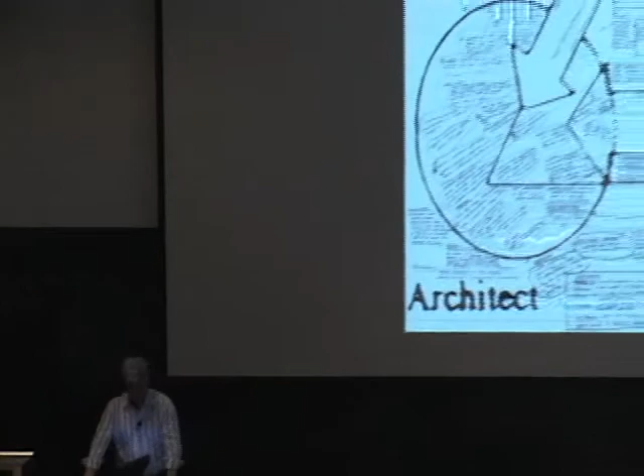Hi, thanks, KB. Since your lecture series is entitled Practice, I thought I would give to the students a kind of a short history of modern practice. If you were practicing maybe 30 years ago, the diagram of the profession might look like this, with the owner and the architect and contractor at different corners of a triangle. I suppose the arrows here are flows of information, most likely. But also note that the circles are the same size, they're all equal in this equilateral triangle.

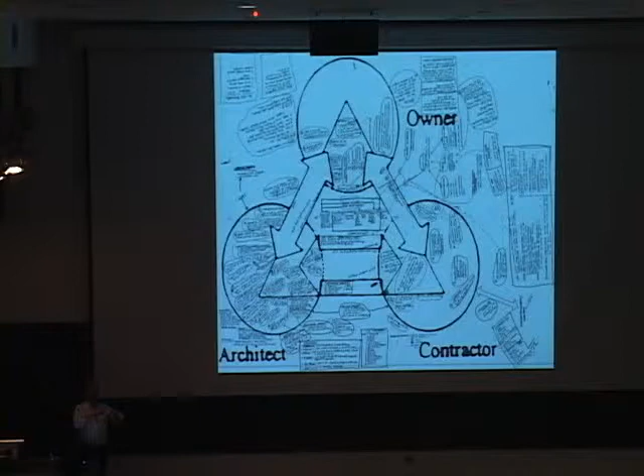So the point being, along with this diagram changing, the profession has changed and the role of the architect has changed, okay? The profession is at something of a crossroads right now, and we have to figure out how we get back toward the center of things. One way is the architect now has to think more about the how, as much as the what.

So as an example from practice, this is a project we recently did. It's a public high school, and when you're doing public work, there's a lot of mandates. There's a thick book of standards you have to follow, everything from room sizes to the materials you can use, and the building had to be masonry. So what can we do with masonry?

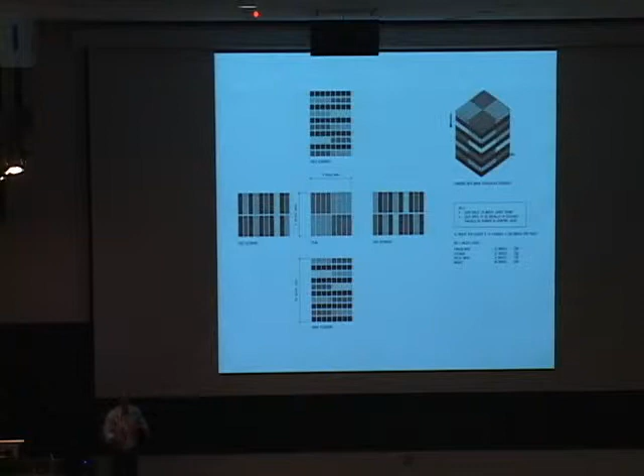So that was off the table, it was too expensive, so we had to do a running bond, or we said, wait a minute, what if we think about this? So we researched the bricks and went back to the brick yard, and we found out that they would palletize the bricks in any order or any way that we wanted. So working backwards from the desired pattern, we came up with a configuration of a pallet of bricks such that a mason could grab one in an unthinking way and put it into the wall, and our desired pattern would result. These are some early studies.

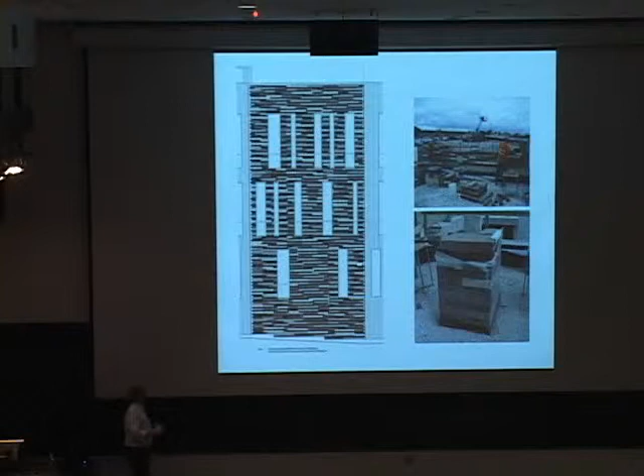Sounds easy, was actually very difficult. We spent about three weeks working this out. Here's one of the failures. We had to figure out what happened when you came to a window, how that would mess up the pattern, and how we came to the corner. Once we thought we had that figured out, we built a little mock-up here on site. Here's one of the pallets of bricks coming to the site. And then we got it reasonably worked out.

The next challenge was that the masons worked 12 to 15 abreast, working at the same time, almost like typewriters going along a line, then another line, another line. So we used the control joints that were necessary in the brick wall to control the area of work for each mason, and each mason got his own pallet of bricks. This is the resulting wall, which we were pretty happy about. But it illustrates the new kind of work one has to do. Maybe 20 years ago, we could have just told them to do it that way and gone off and had a martini. But it doesn't work that way anymore.

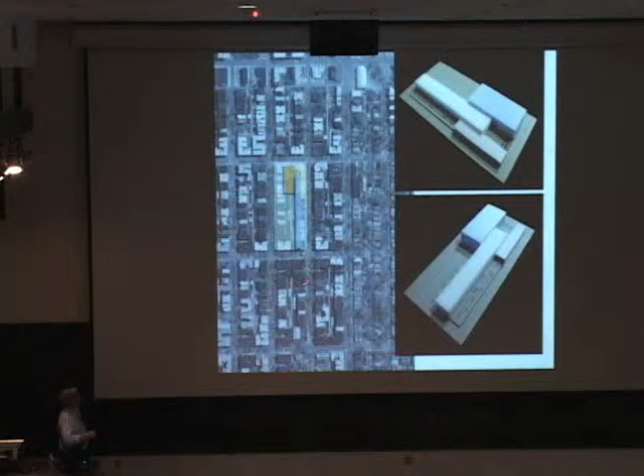This is a prototype high school, I should mention. This is a little more on that project. The idea was to design a very compact urban high school that would fit on a single city block in Chicago, measuring 266 feet by 600 feet. So we would slide these little volumes back and forth.

Again, it's mostly about configuration and circulation because the classrooms are somewhat dictated. So here's an entry plaza here. This is a reading garden off the library, and then this would either be parking or athletic fields, depending on where the school was located.

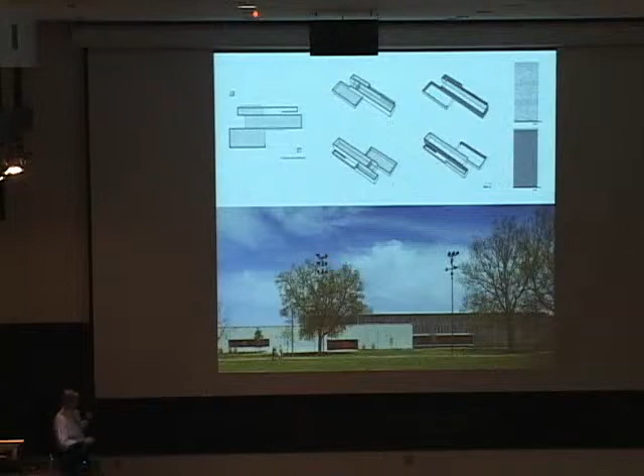This was the first one out of the gate. This is South Shore High School, not far from the Gary Comer Youth Center. Here you can see it in context. Again, this idea of a very thick wall that served as a thermal mass for the building, and it would snake through and create these three zones, body, mind, and spirit, we called them. The wall would be light on one side and dark brick on the other, so that your view or perception of the massing would change based on the viewer's perspective.

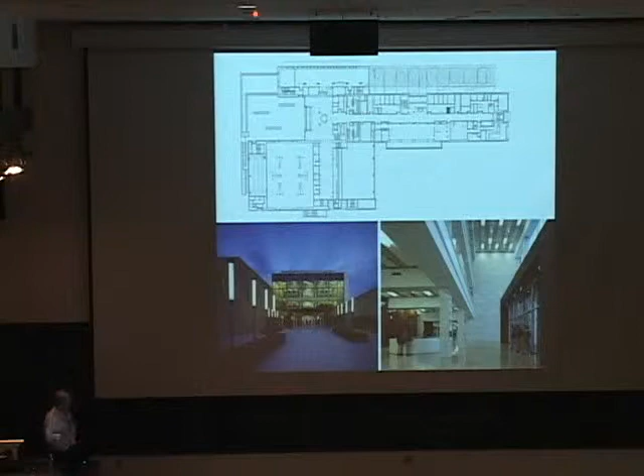This is the second floor. There's an academy here with a commons, which you see here, that looks down over that entry plaza, and then the arts wing with art and music rooms.

This is the third floor. Note the clerestory lighting brings natural daylight into the corridor, and then there's little windows above the lockers there you can see. So you're getting indirect light into the classroom, natural light from two sides into every classroom.

One of the features we built into the school was that certain components, the gym and the library namely, could be used by the community when the school was closed. A lot of these schools are going into neighborhoods that maybe don't have libraries or recreational facilities. So by doing this, the neighborhood can get both a school and a library, a recreation center, and so forth.

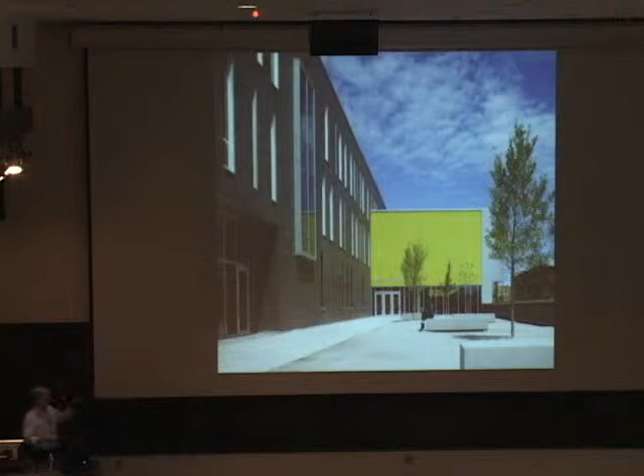So this is the entrance to the library. When the school is closed, you enter through a raised reading garden that pulls students off the street, which is a little bit dangerous in this part of town. This is the gym entrance, which is immediately adjacent to playing fields.

That idea really came from this project we did in 2003, the competition for the Perth Amboy High School, which we won in January of 2004. It was a high school for 500,000 square feet for 3,000 students in Perth Amboy, New Jersey.

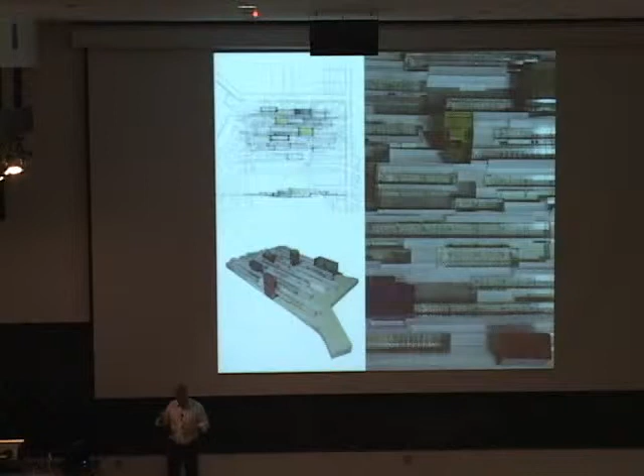Perth Amboy, similarly, had a demographic of lower income neighborhood, a lot of recent immigrants, and not many amenities, not great libraries or facilities. So the building was designed almost like a civic cultural center superimposed over a high school, where the communal functions, like the gym, the auditorium, and so forth, were housed in these towers that would come down and spike through the classroom, so the community could come at night and use the library and the gym without going into the school.

So the design is exploded here into these three systems. These are the towers that house the communal functions, the gym, the library, auditorium. This is what we call a barscape, a one-story system of academic tissue, or classrooms, that would span over this mat, which is the surface of the site, high at either end and low in the center.

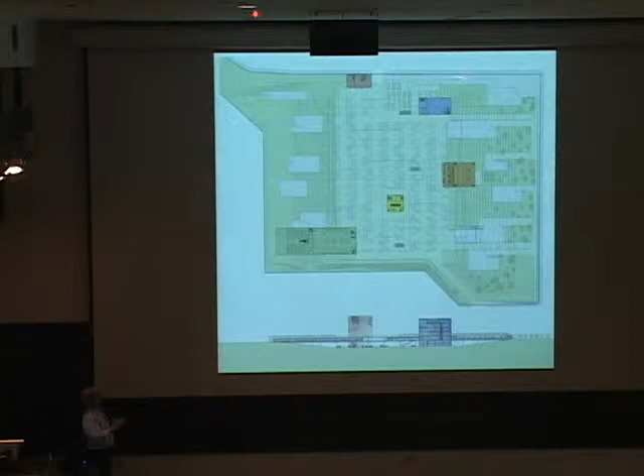So we do all our parking on grade and then come up vertically through the building. This is the mat level plan in section. You can see how the site is high on either end and low and flat in the center. This is where we would park the cars underneath the building and then come up into courtyards and so forth, so somebody from the community coming at night to go to the library could drive in, park near the library, and go directly into the tower without entering the school. This is an image from the parking level going up to one of these entry courtyards that then leads into the building.

This is the main classroom level plan, or barscape plan as we were calling it. The school is divided into six academies that were keyed into the local economy, so kids could graduate from school and then go right into a job.

Each of those academies was anchored by a tower. For example, this is the Performing Arts Academy, anchored by the auditorium.

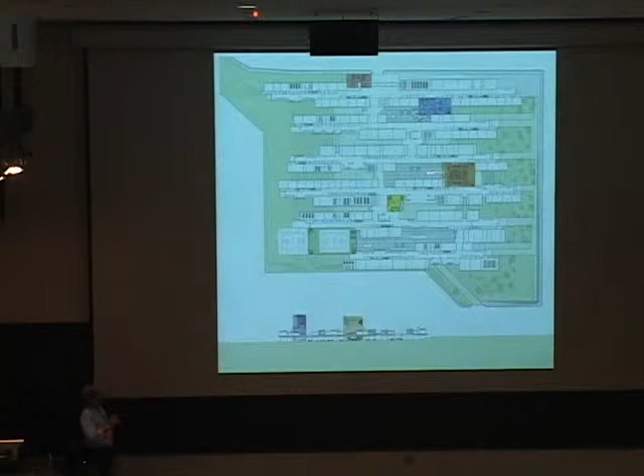These three spaces are the outdoor courtyards you enter from the parking area—entry courtyards. There are also outdoor classrooms and spillover space for events, like a graduation happening in the auditorium that could spill out into those protected courtyard spaces.

Like an organism, the building was designed so it could expand over time and increase in capacity by 25%. Think of the towers as vital organs, and this as the tissue that could grow to expand with demand.

The towers were coded with graphics so people from the community would understand them. Someone trying to find the library would know to go to the yellow tower. In a school for 3,000 students on a 16-acre site, the towers also serve as navigating devices once inside, to help find your way around.

The spatial idea—the tectonics—involve a platform made of precast double T's, then light gauge metal construction forming this bar-scape, with the towers coming down through conventional braced steel frame construction.

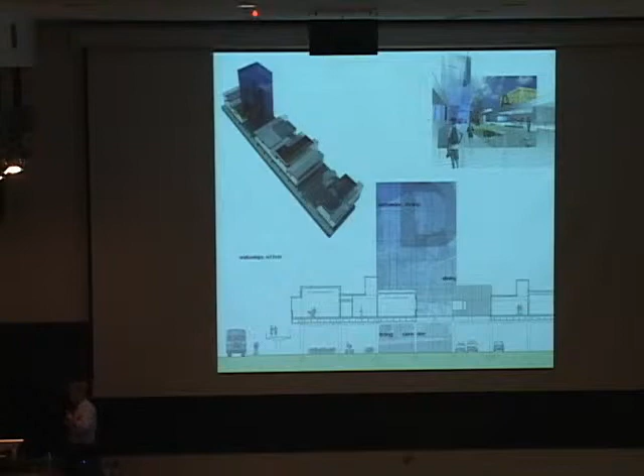So the formal idea is really an agglomeration of very simple forms. We were searching for more of a spatial complexity and a formal simplicity. The forms mean nothing in and of themselves.

It's when they're combined—being in one space and looking through a second space to a third space. This is a theme in my work that we picked up on the Gary Comer Youth Center: this notion of spatial layering, being in one space and looking at a third space through a second space, where you can be both actor and spectator at the same time.

This is a view early in the design process of being in the entryway, looking through the cafeteria into the gym, and then out the other side of the building.

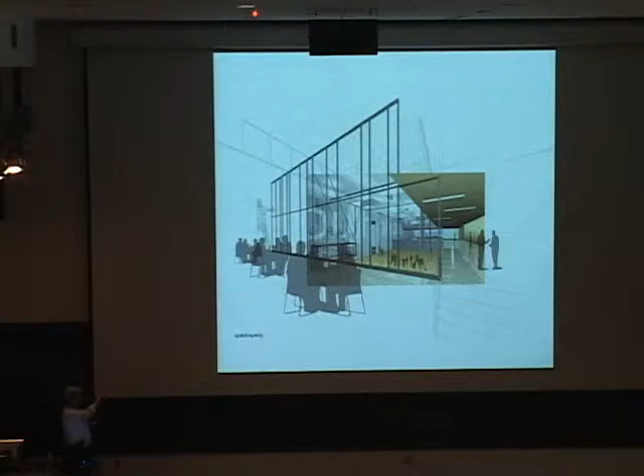This is the Gary Comer Youth Center. It was originally designed as a practice and performance space for the South Shore Drill Team, a dance and performing arts troupe.

Here you can see them practicing in the building. When we were designing it, it started as a gym, a practice space, but quickly grew into a youth education and recreation center—really to provide kids a constructive environment in their after-school hours, because this neighborhood was prone to a lot of drugs, gangs, and problems. The idea was to give them a constructive environment to spend those hours.

This is the drill team practicing in the gym, and this is looking up through the cafeteria to the rec room. This is from a bridge looking through the outdoor courtyard and then on into the gym. The parti is comprised of the main spaces for the drill team in the center, and a series of programmatically indeterminate bars wrapping around that space where we could plug in programs over time.

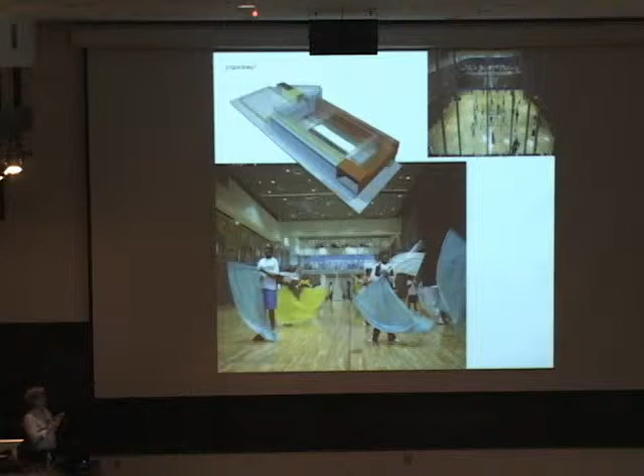Over the course of design, construction, and even after construction, the program was changing so quickly on a weekly basis. We adopted that strategy so we could continue designing the building while the owner came up with new ideas for programs he wanted to include.

This is the ground floor plan. There are two entrances—a street entrance and a parking lot entrance—and a large lobby. Out of this wall, seats are deployed, 625 seats. These doors open up, there's a large stage here, and that gym transforms into a theater.

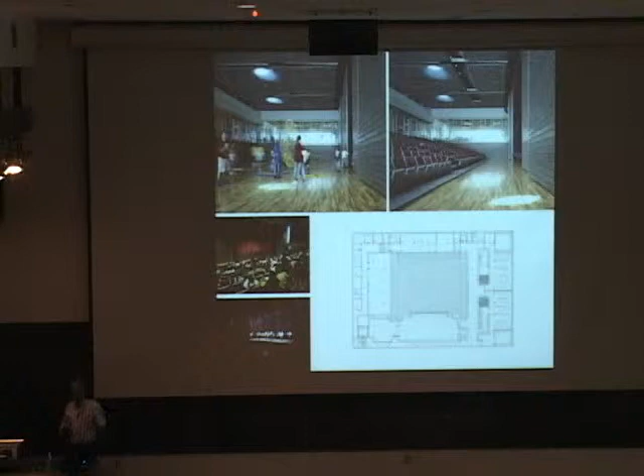On the upper left is the day-to-day mode of that space, and on the right you can see the seats deployed, with a large wall that opens up to reveal a very deep stage. Panels in the ceiling open up, with stage lighting up there. The two inset photos on the lower left show the actual space in theater mode. They have about 25 performances there a year.

This is the second floor. You can see some of these wrapping bars that wrap around and have very different programs. This is a dance room here, which you see here. Exercise room, rec room, which you see here.

This is music and band rooms and an art room. Up on the third floor, a similar arrangement, classrooms, exhibition space, which you see here. Little recording studio, art room again, computer lab.

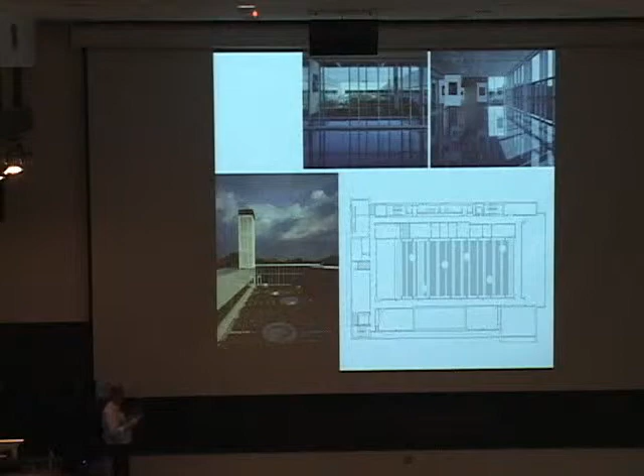All of this looks out onto this large roof garden, which is planted with 2 feet of soil. So the owner wanted to do some kind of green roof. We talked to them about it, and since the concept of the building was really about youth education, let's make this an outdoor horticultural classroom. So it has 2 feet of soil. The idea is the kids can grow and harvest food crops and then take them down to the ground floor, the kitchen space, and use those in the kitchen in culinary arts classes.

And then the LED tower was signage to announce upcoming events in the center, which could be seen from an adjacent elevated highway.

Also, one of the problems with the neighborhood is it really didn't have an identity like other neighborhoods in Chicago, like Hyde Park, Lincoln Park, the Gold Coast. So although it did have a name, Grand Crossing, we wanted to bring a certain sense of centeredness to the neighborhood, so that tower sort of functions as the center of the community and an identifying element, much like a church steeple in a medieval town, let's say.

The exterior cladding is a rain screen cladding of fiber cement panels, as you see here. So that inset photo, you can see—I'm having a hard time.

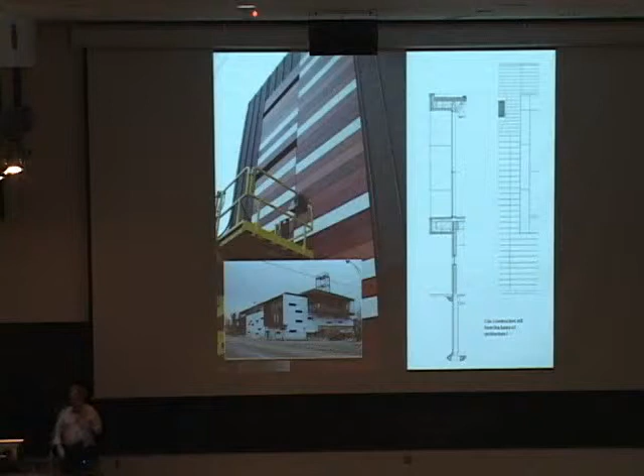And I think it calls into question the question I put up on the wall: can construction still form the basis of architecture? I think that's an open question, and one maybe that your generation will have to answer.

This is the idea of the fiber cement panels. They're meant to refer to the colored flags and uniforms of the drill team. The drill team didn't want any windows because of the occurrence of drive-by shootings in the neighborhood, so we kind of surreptitiously fit windows into here. We were also worried about graffiti, so that we could come back later and replace one of these panels if it ever got graffitied, and I'm happy to say that it hasn't.

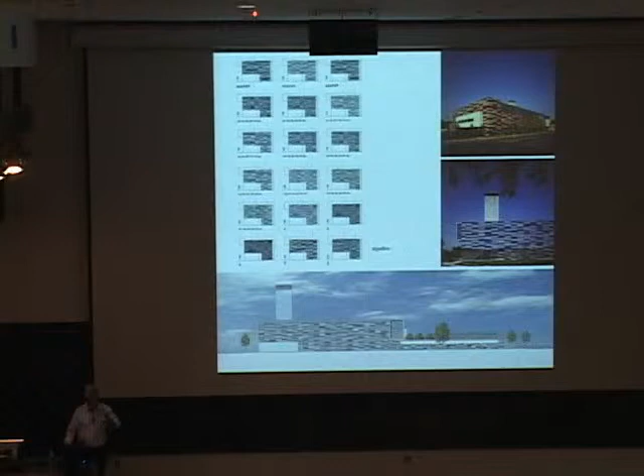Of course, a lot of study goes into this. These are some of the early studies where we write an algorithm and then manually or visually modify it to get that final pattern.

This is a view from the alley, looking at the art room. And then the building at night, sort of transposed. So in the areas where we did have glass, we ended up using bulletproof glass here, here, and here. The rest of it is natural glass, typical float glass.

So that was in 2006. In 2010, we built this high school, which is a charter high school, just north of the youth center.

The foundation realized that the kids in this neighborhood didn't really have many options in terms of education. They had the local public school, which was underperforming, but no real college prep options. So they brought in a charter school network operator and opened Gary Comer College Prep.

The high school was in the youth center for the first two years of its operation, and then moved into this adjacent building. We also realized that the youth center was underutilized at the time - during the daytime when the kids were in school, it was lying empty most of the time.

So the idea here is that this is mostly classrooms and offices, and kids would walk back and forth to go to the cafeteria, the gym, music rooms, art rooms, and so forth. So the two buildings would form a campus, allowing the high school to be very lean in its design.

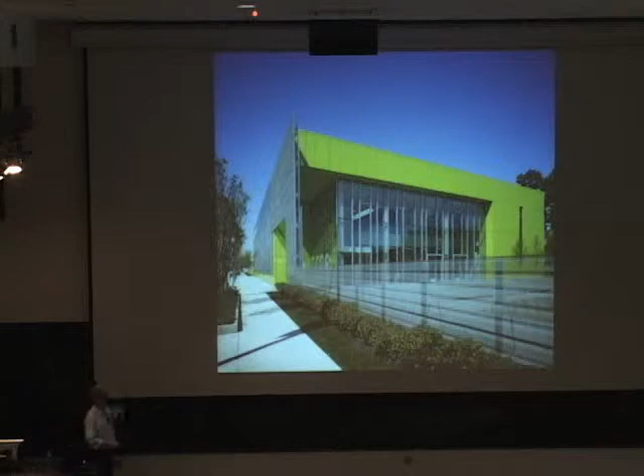We took what were secondary materials on the youth center and made those primary materials. That stainless steel wraps all the way around the building. The spring green cladding refers to the youth and optimism of the teachers in the school, most of whom are in their 20s and in the Teach for America program - a lot of high energy young faculty members.

These are some views of a little plaza area. We wanted to get the kids off the street, because in a neighborhood like this, the kids going to the charter school are something of targets to the other kids that are in gangs and so forth. So there's a little area where they can hang out before and after class.

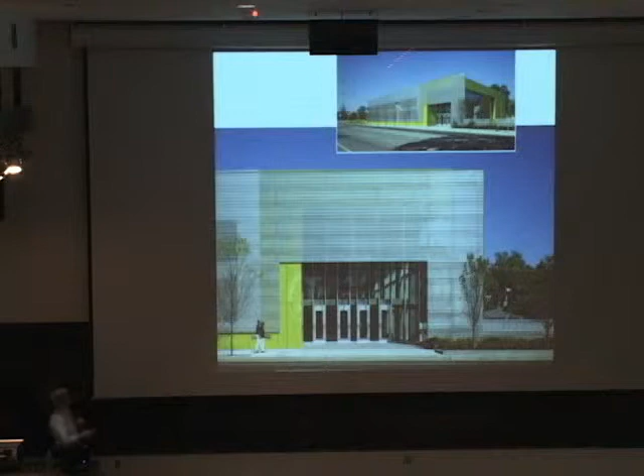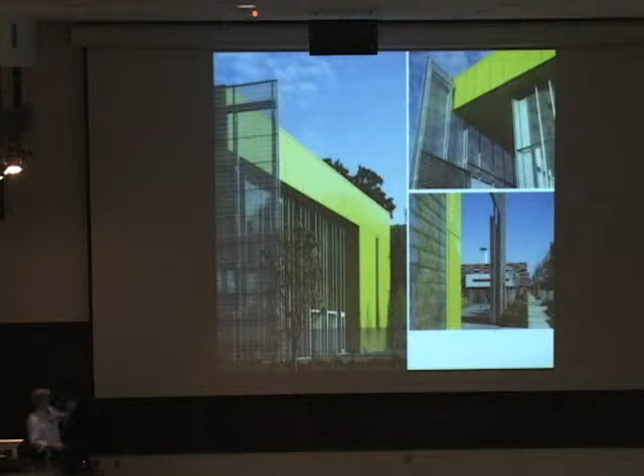These are some views of a gated area. We have a gate that closes off that little plaza for security reasons during the daytime. As I said, we ran this corrugated, perforated metal across the windows for security. It gave the building a streamlined look, but also served a couple functions. One is it makes it very difficult to see into the building from outside during the daytime, but very easy to see out from inside to outside. Because of the predominance of drive-by shootings and violence in the neighborhood, we felt that was important. It's also, in a secondary way, a sun shading for the buildings.

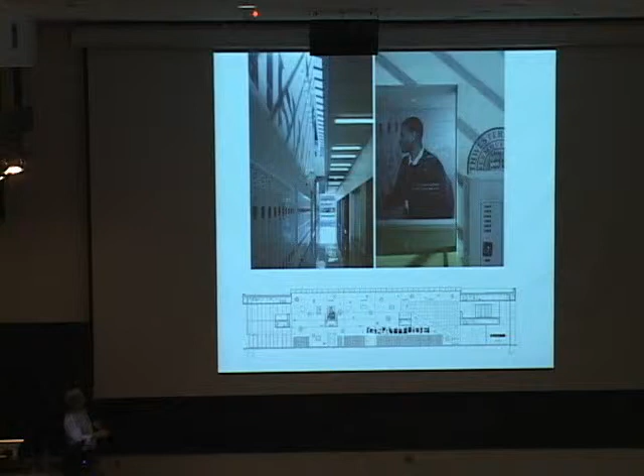You'll also notice the skylights running down the length on the interior. That brings light down into the center of the building. So we're getting light from the exterior, and we're also getting it right down in the center of the building.

This is the second floor, similar arrangement here, but you'll notice all the classrooms have glass walls on the corridor. So here you're in the corridor, you're looking through a classroom and then out to the alley, looking through the perforated siding there. This happens to be an English classroom. The idea of this glass was to reinforce the school's ethos of responsibility and transparency.

So the architecture is not just reflecting their goals, but actively shaping the culture of the school. This actually evolved out of the time they spent in the youth center, because the exhibition room, the glassy exhibition room that looked out onto the roof garden, turned out to be the most popular classroom with the teachers that taught there. So we said, let's do that everywhere in the new building.

This is the phenomenon here of what the building looks like on the outside during the daytime, and then this is inside looking out.

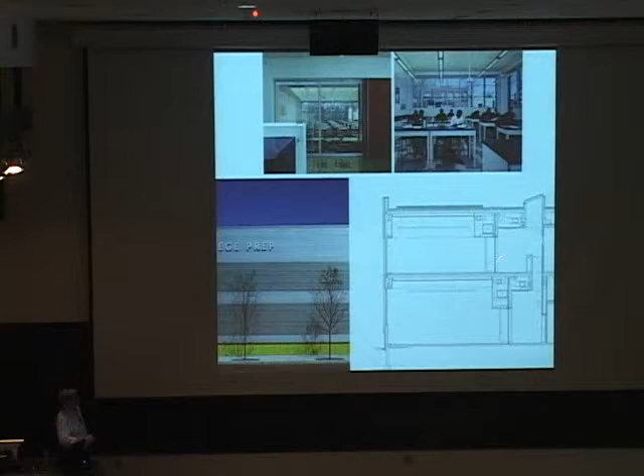So here you have a section. This is the skylight that runs the length of the building, with a little green roof up here. The second floor is pulled back, in kind of a balcony condition, so that natural daylight can get down to the ground floor. And this is the corridor glazing, so you're getting natural light from both sides, from inside and from the outside.

We also do, thought I'd show you one of our kind of quirky renovation projects. This is a project we won in a competition a few years ago. This is in Washington, D.C. This is an old commercial laundry that was converted to residential use. This is where the linens of the White House would have been cleaned at one time. And we converted it to residential.

We noticed in looking at the existing building that it had a very unique physical history. There was a lot of character to the walls, these irregularly spaced joists and so forth. We felt that the strategy should really be to preserve as much of this character as possible, and then almost overlay the new elements of the design, inserting them almost like furniture. So the quality of the project would be the sum total of these two parallel realities. You'd have this kind of old shell here, and then this new millwork which was inserted inside.

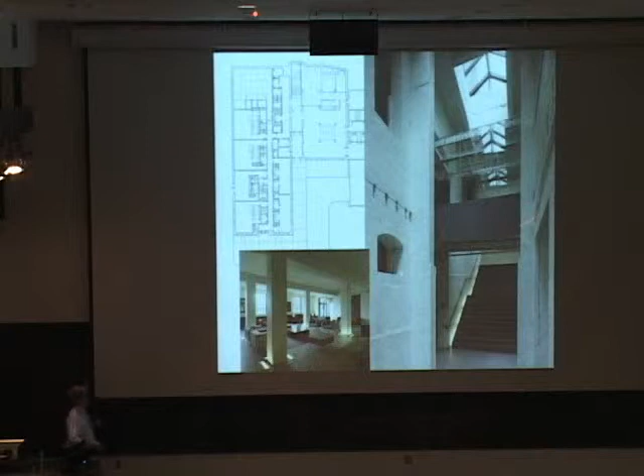So in the units, we'd have these millwork kitchen and bathroom units that would slip in there, and then in the public spaces we had this hot rolled plate steel. This is actually a bridge that connects two parts of the second floor, and a plate steel stair in the lobby.

This is looking into that bridge that leads from the elevator area into the fitness area. The units in the center here are duplex units, so they have a living space on the ground floor and then a stair that takes you up to a bedroom level. This is a view of one of those units. And then these units on the end were flat, so this photo is taken inside of this unit here. Some of the plate steel entryways.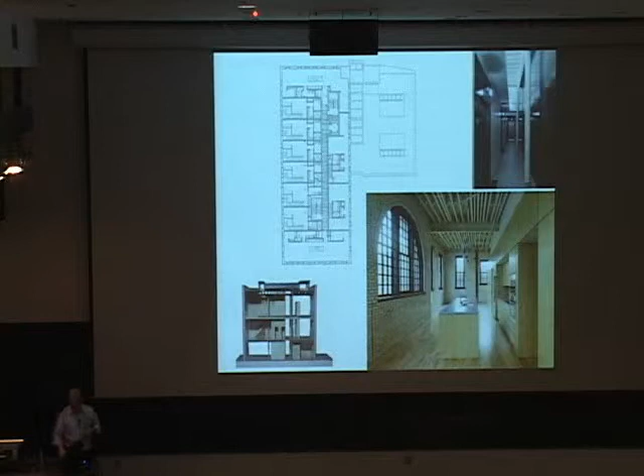As KB mentioned, we do a certain amount of speculative projects. Several years ago, I was asked to come up with an idea for the old post office in Chicago. The old post office was built in 1920. It was the largest post office in the world when it was built, because of all the catalogs being shipped out of Chicago from Sears and Montgomery Wards and so forth. It's been vacant for many years now. It's about 3 million square feet of space, and has a very robust structure, which has defied its conversion into residential use or hotel use.

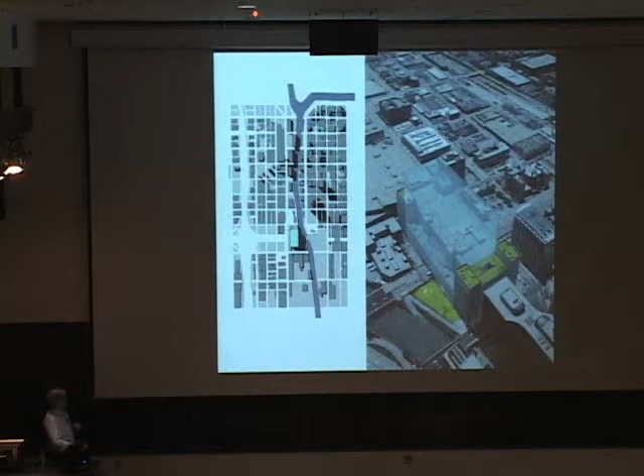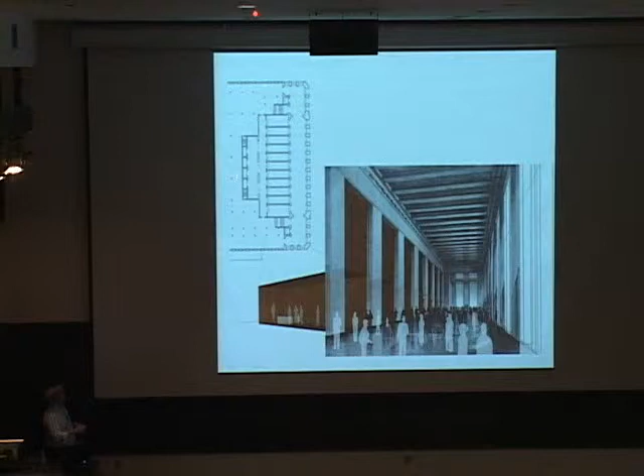This is a little landing here, and a ramp leading you up to the building. So funeral barges would come down the river. There would be a landing here and then a ramp that would take you up to these very large Corten steel doors. The doors open and reveal the old post office lobby, which now would be lined with these funeral chapels on one side. And then a bank of elevators would take you from the funeral chapel upstairs into the crypt level, where the crypts would be stacked six high.

This is a floor plan of a typical floor, where you get a sense of the size of the floor plate. I think it was 300 by 800 feet. So 90,000 crypts and niches on one floor. That's everybody that would die in the city of Chicago over four years could be stored on one floor of this building. This is the crypt, made out of glass fiber reinforced concrete.

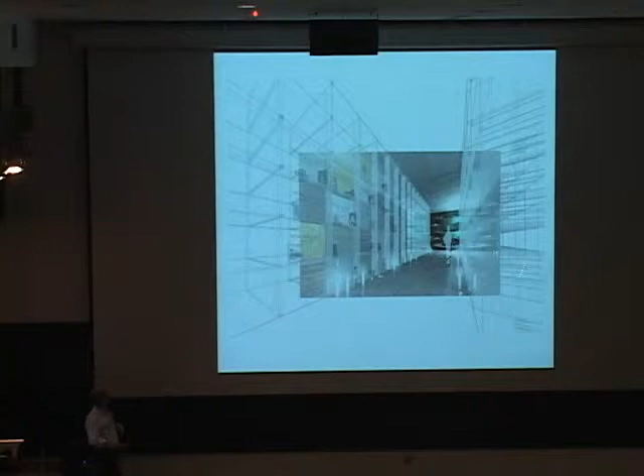There'd be a little stone plaque and then a little reliquary so that you could put mementos that would tell the story of that person's life. So that when you're walking amongst the crypts and looking directly or frontally at the crypts, it's all about the individual and their life. But when viewed obliquely, that wall would just dissolve into a single reflective plane.

That project led to this. Recently, the same group came back and asked us to rethink Chicago's neighborhoods, specifically the neighborhood around Loyola University in Chicago on the north side.

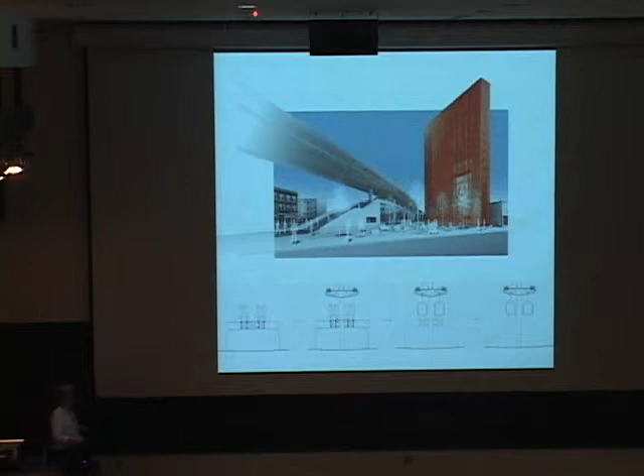What we proposed was basically a new L train for Chicago, a suspended maglev train to clean out the station. This red tower would become a car sharing tower, a storage tower for electric smart cars. So you could hop on the L, take it into town, rent a car and do your errands and so forth, bring it back and get it back on the train.

This is a section through the proposal. Here you have the structure for the train, and the cars would be suspended from that structure. Up on top there would be a kind of speedway for bikers and joggers to get quickly downtown and off the streets. It's a real problem in Chicago - cars and bicyclists are always competing for territory.

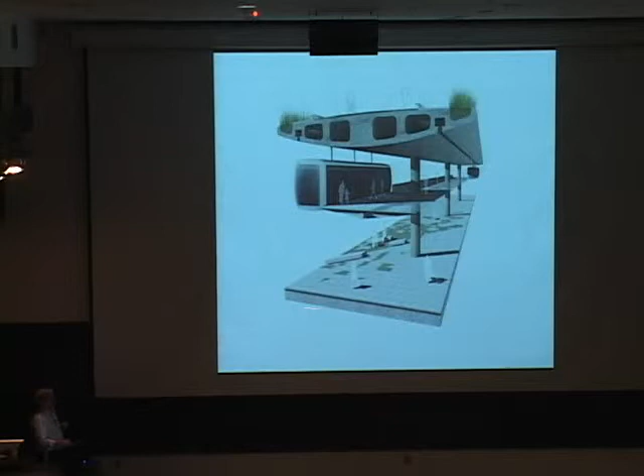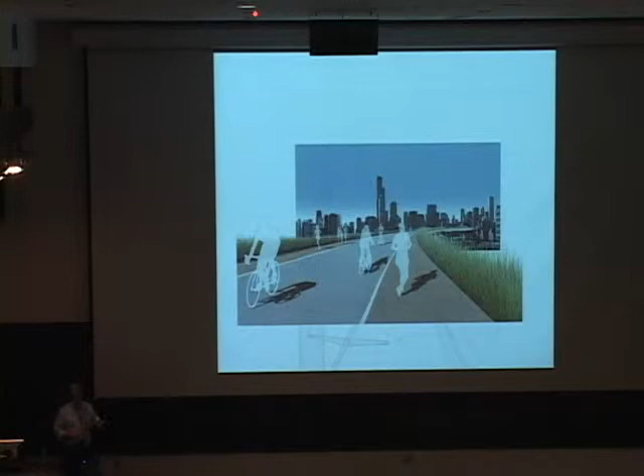It would open up the ground plane for more public space, a public plaza where people could come and interact. This is a view of the top, where traffic would be broken into different lanes for bikes, joggers, and Segway riders, to encourage more sustainable modes of transportation.

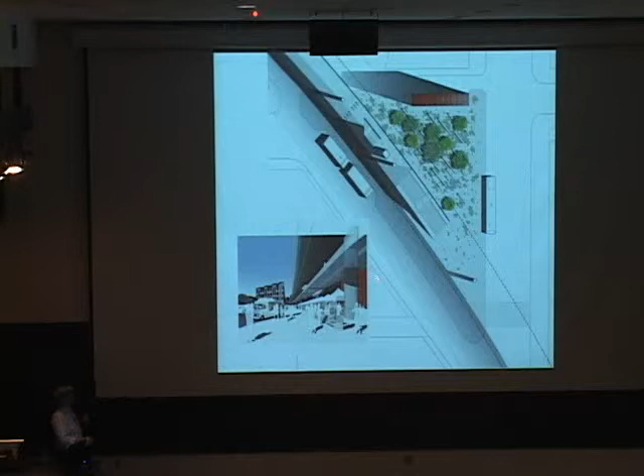The area under the tracks would now be freed up for markets, farmers markets for local produce, or food trucks, things like that. We also wanted to harness piezoelectric energy, so the daily traffic going up and down that stair would generate electricity to light the platform at night.

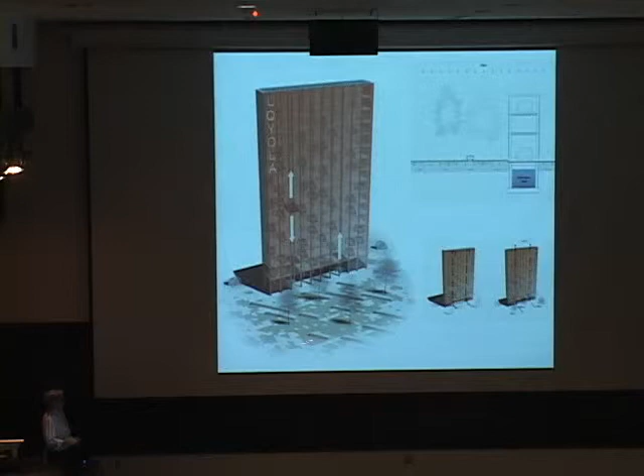This is the car share tower - there would be an elevator that would take the car and store it. It would be naturally heated and ventilated, and below it, it would collect water on top in a cistern in the foundation that would be used to irrigate the plantings in the plaza.

This happened to be a stop on the red line, so there's an identity component to this - that explains why the tower is red. It's a kind of signpost for the entry of the Loyola campus and also the Loyola stop on the red line.

I'll show you a couple of competitions we recently did. We do about one or two of these a year.

This is a recent competition to design a memorial for Daniel Burnham in Chicago. Burnham, in case you haven't studied him, was the one who opened up the lakefront in Chicago as a kind of public green space, among other things, coming up with the plan of 1909 and so forth. So the idea - monuments are usually an object.

I said, well, what if we did a monument that was a space? The idea is to create a space here that people would pass through and could ascend up to this level on the museum campus. Here's the planetarium, aquarium, the field museum, and then you enter this area underneath Lakeshore Drive, which was rerouted several years ago, and you're about 20 feet below the level of the museum. So this would be a way to get people up.

This also marks the entrance to Burnham Park, which runs along the south edge of Chicago. So the scale of this monument would really be scaled to that larger landscape.

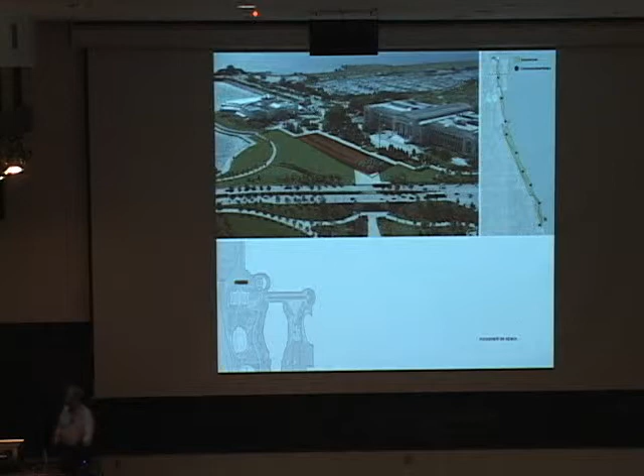These are some of the intended results of it. This is kind of existing. You have a lot of conflicting geometries here: a Beaux-Arts geometry, an Olmstedian looping pathway, and some new things. We'd clear all that up and restore some of the green space that Burnham had dedicated his life to providing.

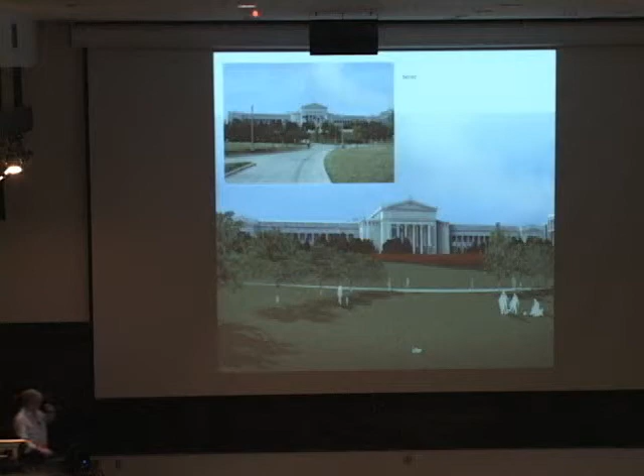You enter this area underneath Lakeshore Drive. So this is the view you would get coming to the memorial. You would enter along this path, come into a tree grove here, and then up a stair and ramp up to the level of the forecourt of the museum.

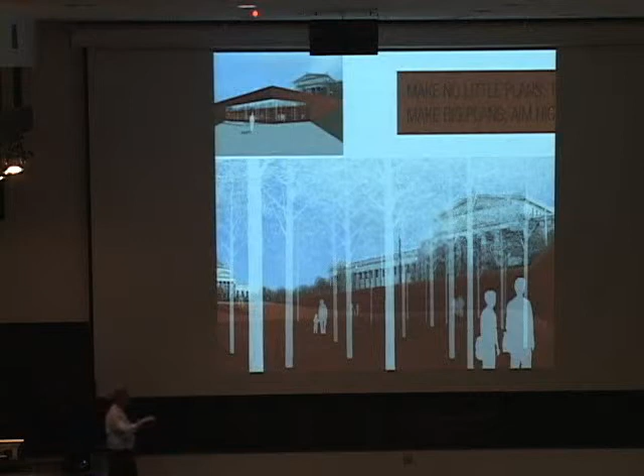This is entering into this tree area. The surface of the ground would change to decomposed granite, so you'd hear this granite crunching beneath your feet as you walk through these trees. Inscribed on the wall would be Burnham's famous dictum here.

And then the location of the stair would realign and restore the axial approach to the Beaux-Arts aquarium. You'll notice on the left here there's a kind of smear portrait of Burnham. The idea was that Burnham's picture would be plasma cut into this steel ramp.

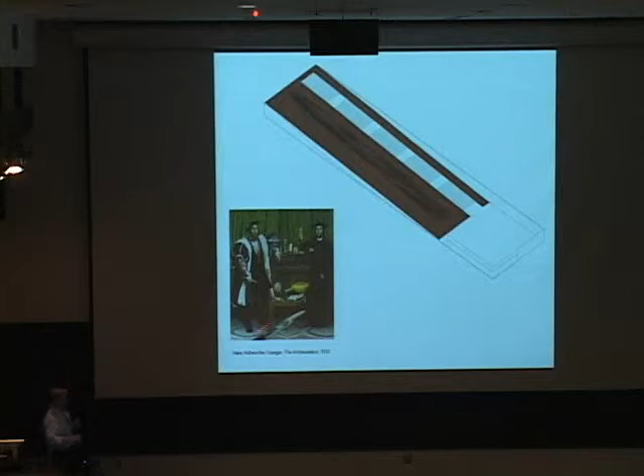It kind of references a painting you may have seen, Hans Holbein the Younger's Ambassadors, on display in the National Gallery in London. It's basically these two brothers who were explorers, shown with all their worldly things picked up in their travels. Then there's this white smear of paint at the bottom of the painting, which if you look at it from a certain direction, collapses into a skull.

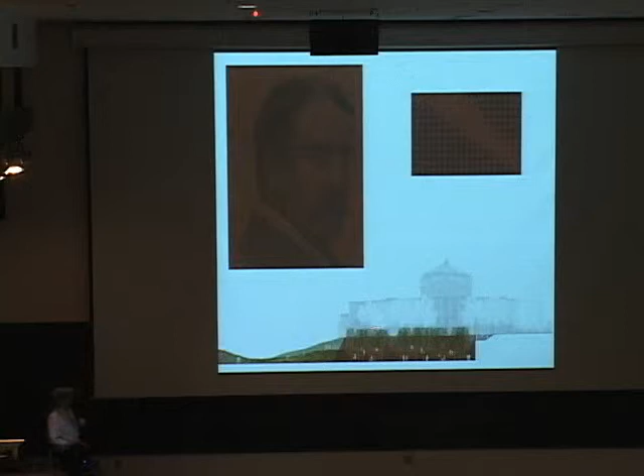So when you see the skull, the brothers' image is distorted, suggesting what is reality here and what is illusion. In a similar way, standing at the base of that ramp, the image or portrait of Burnham would come into focus. You could enter and pass through this and either see Burnham or choose not to see him, almost suggesting that perhaps it's time we forget him and move on.

Of course, we didn't win this competition, but...

This is a competition for a chapel at a retirement village, an Air Force retirement village in Texas that we recently did. There's a huge campus of buildings scattered all over, mostly low buildings, and the site for the chapel was here.

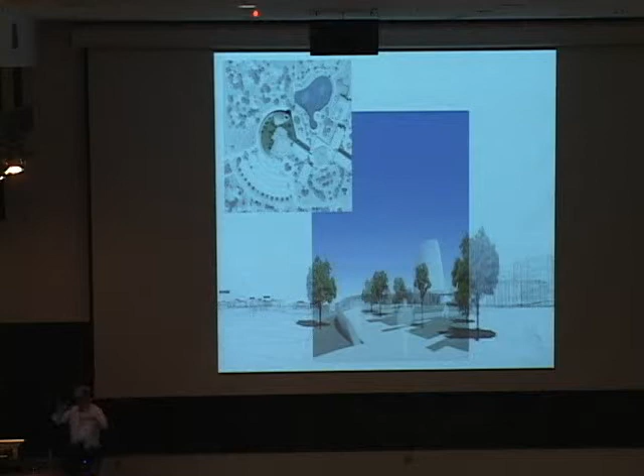So we proposed this low, one-story narthex that you walk into, and then this three-sided tower over the sanctuary, which would become a visual marker one could see anywhere on this campus, which was very disorienting.

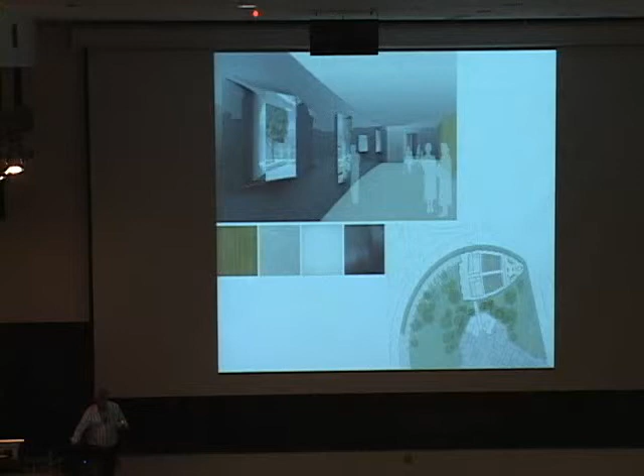This is a view of the chapel garden that you would enter through. The detailing of the walls references aluminum airplane technology. The image there is inside the narthex looking out to the chapel garden. We would use local materials like Texas oak and limestone, as well as materials more identified with the aeronautical industry.

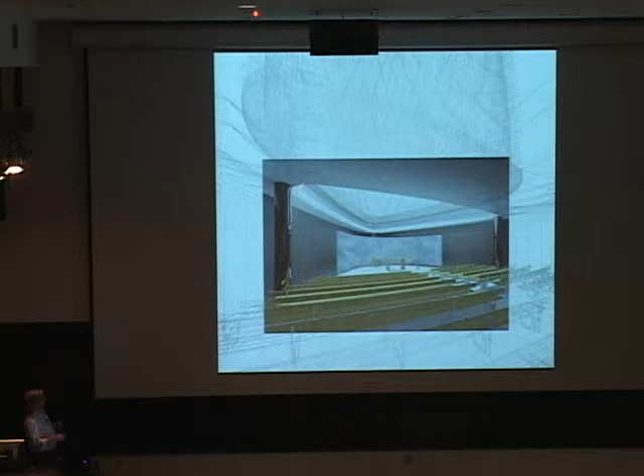This is inside the sanctuary, so you come in and there's a chancel screen here that is derivative of Air Force camouflage uniforms, and then this very large lantern that brings natural light into the

front of the church. It would be a three-sided tower, shaped like this, coming down on three points representing the Trinity. And because of this shape, as you moved around the campus, the shape of the tower would appear to change.

The design of it would be two layers of glass with a diagrid. This is called an isotopic deck, I think, where you'd have a diagrid of aluminum sandwiched between two layers of translucent glass.

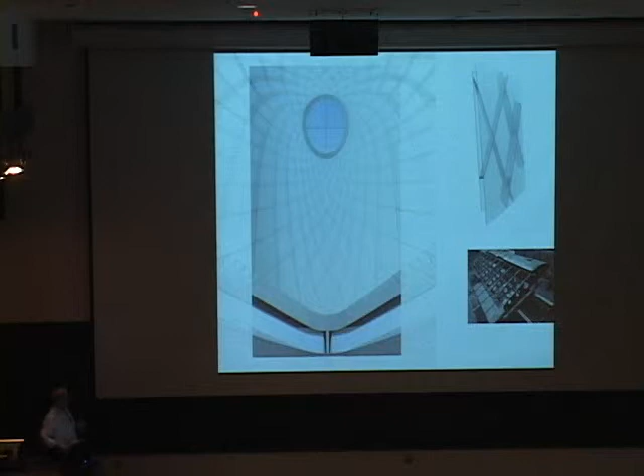So the idea is this would become a marker anywhere within the landscape, and then at night you'd see its reflection in the man-made lake that the campus is organized around.

I'm going to spend the rest of my time talking about a building we finished last summer, the Poetry Foundation in Chicago. So I'll give you the short history of the Poetry Foundation, which is...

Poetry magazine was published in Chicago since 1912 on a monthly basis. It was started by a woman named Harriet Monroe. It published without a gap for decades, but always on a shoestring budget. About 10 years ago, out of the blue, they received a gift of $200 million from a pharmaceutical heiress in Indianapolis named Ruth Lilly. With that money, they started a foundation, and one of the first things the foundation did was decided that they needed a home for poetry.

They needed a place where they could do poetry readings. They needed a place where they could have a gallery with items related to poetry. They needed a library where people could come in and read poetry. They also needed office space for their magazine and so forth. But one of the unusual requirements they gave us was, we want to incorporate a garden in some way in this building.

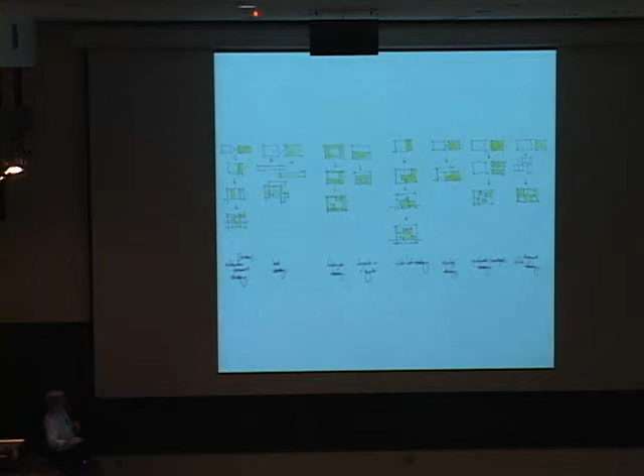So the early design was centered on how do we create, or how do we combine a garden with a building. So these are some of the earliest sketches I did. These are different strategies for combining a garden with a building. So kind of knotting or overlapping or superimposing or perforating.

Then taking those strategies and putting them on the site, making them site-specific, which of these work, which don't. So these are maybe half of the early study models, trying out different ideas on the site. We all gravitated towards this scheme, in which the garden is created almost by scooping out the garden out of a virtual volume as described by the boundary of the L-shaped site.

And then the idea in the building is that this would not be something intended to shock you or something you would slam on your brakes and look at, but really more of an unfolding sequence of spaces, right? An unfolding spatial narrative that you would have to walk through to understand, okay? So you wouldn't get it in one, it's not a one-liner. You wouldn't get it in one image. You would have to actually go through it, like poetry.

So it would unfold space by space, almost like a poem unfolds line by line. And like good poetry, it might be a building you would come back to and get something more out of the second time you came there and the third time you came there, right? It'd be something that would merit that kind of attention.

These are some of the early models in the context, mostly residential towers around the site.

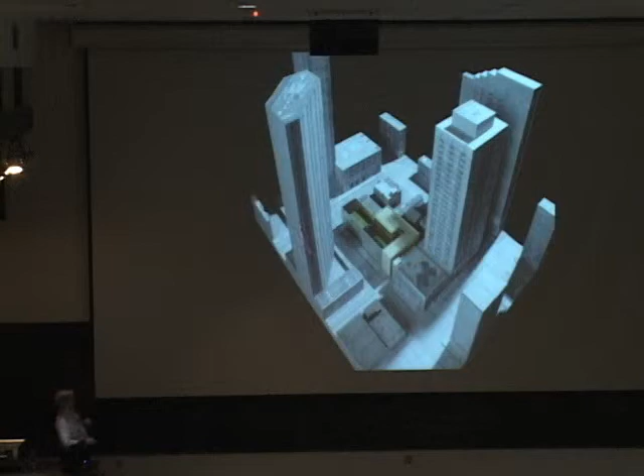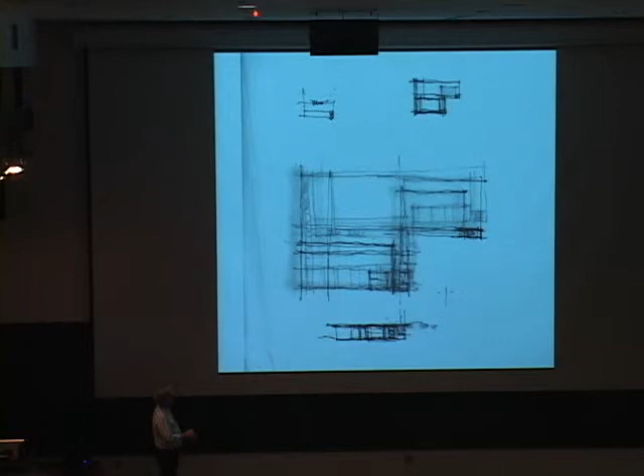So this is laying out the structural grid of the building. This is the garden here, some of the main areas with the offices back here. This is later on. This would be in design development.

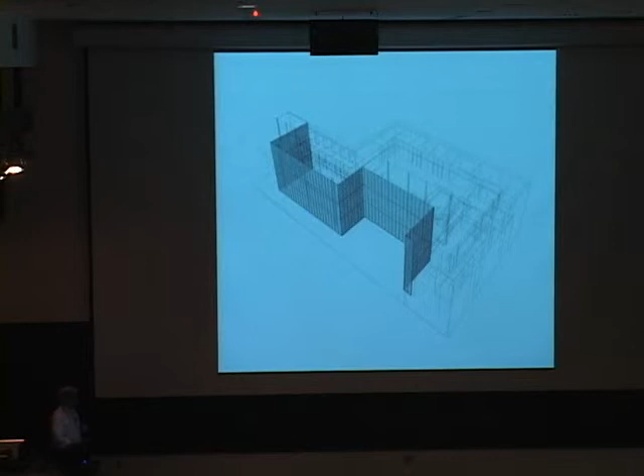These are some drawings of these different layers. This is the wood layer. It starts in the library here at this end, then wraps around the second floor, comprises the working library for the staff upstairs, before dropping back down and wrapping around the performance space, which is where the poets would do the readings. Glass wall would move in and out to compress the space in certain areas and then expand it in others, allowing a connection between the public spaces and the garden spaces.

The garden is conceived of as a plate of concrete, a slab that would roll inside the building, so the public spaces inside—the library, the gallery, the performance space—would feel almost like they're part of the garden. Then finally there's a layer of oxidized zinc that wraps around the building. It's continuous, and where it bounds the garden, it becomes perforated to allow views into the garden from the street.

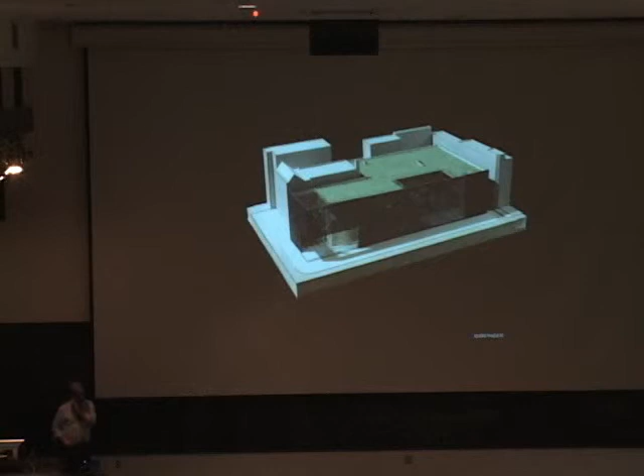Early model showing the layout of the garden. You would enter off the corner. The garden is a sanctuary space that would mediate between the enclosed building and the street outside. You would enter the building by walking through the garden.

The top model shows the spaces, how all the interior spaces are oriented out towards the garden, and this mysterious quality of looking through the screen into a garden, almost drawing people in and intriguing them.

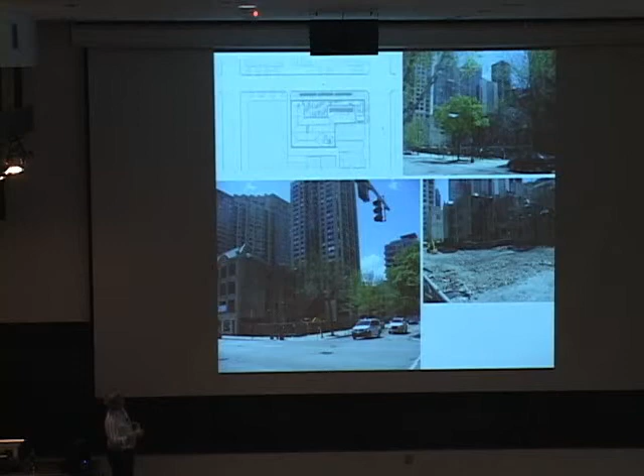These are early construction photos. There were two buildings on site that were torn down, and an asphalt parking lot. This is the site plan—you have the exterior garden that wraps around in an interlocking fashion with the building.

The ground floor is where the main public spaces are. You have the performance space, where the poetry readings are held. You have the library where poetry is read, and a gallery of changing exhibits that connects the two.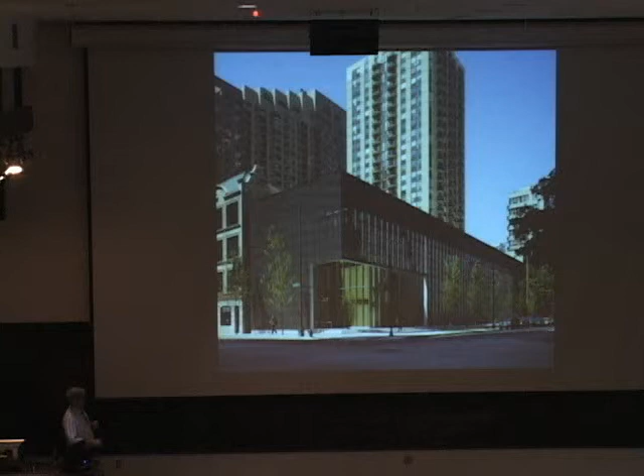This is what the building looks like from across the street. You can see how the layers come together here—the zinc, the glass, and the wood. This is a view looking down into the garden area.

From across the street at the end of the day, this screen would take on different characters depending on the light conditions during the day. This would be late in the day, afternoon, maybe 4 or 5 o'clock.

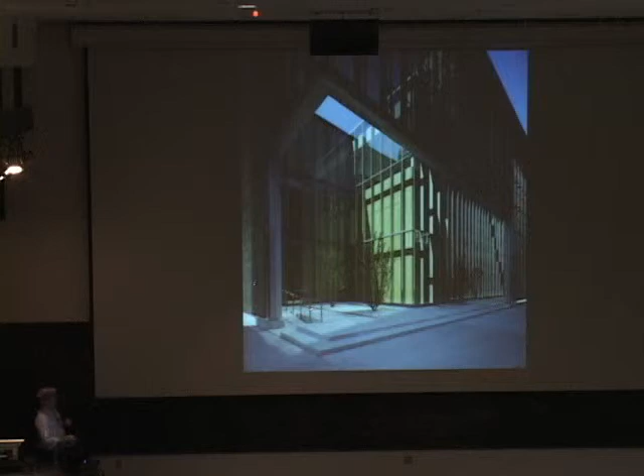This is the corner where you enter. In this area there's a little tribute to Ruth Lilly—you enter into this memorial tribute area. She was remembered on a piece of reflective glass with her name etched into it, backlit so it could be seen 24 hours a day, reflecting the trees, almost saying that without her generosity none of this would be possible.

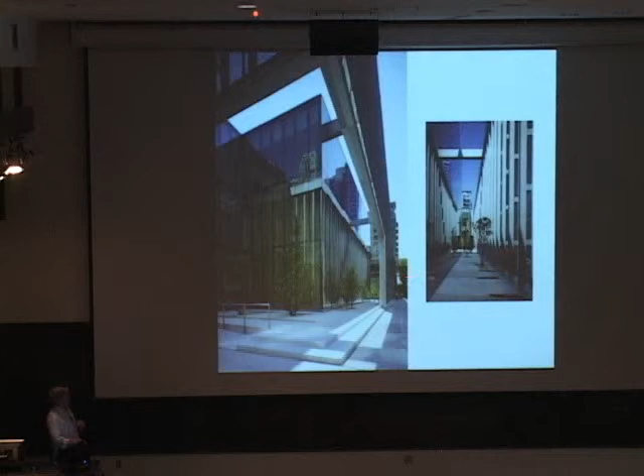As you move toward the main garden through this narrow passage, about 10 feet wide, winding through the trees, you come out into the main garden and the first thing you see is a wall of books announcing that you're entering a literary environment. The space is intended as a sanctuary in the city, a place of quiet contemplation, also a program space—they would have readings out here, openings for the magazine, things like this.

This is the garden at night, viewed from the street looking through into the building, so your eye stops several times—first at the screen, then at the trees, then at the glass wall, and then inside, to increase the perceived depth of that space.

Again, as I mentioned, we wanted to pull the garden plate from the outside to the inside.

This is a close-up of the concrete, which we spent a lot of time developing. Concrete has four ingredients: water, cement, sand, and rocks. So we spent quite a bit of time identifying the rocks. We used a white silica sand and a white cement, and the little bits of black are slag that we threw in, a byproduct of the steel manufacturing process. Then we sandblasted it all.

So the approach to the materials in the building is really a kind of transcendent materiality, I would call it—taking something very humble and transforming it.

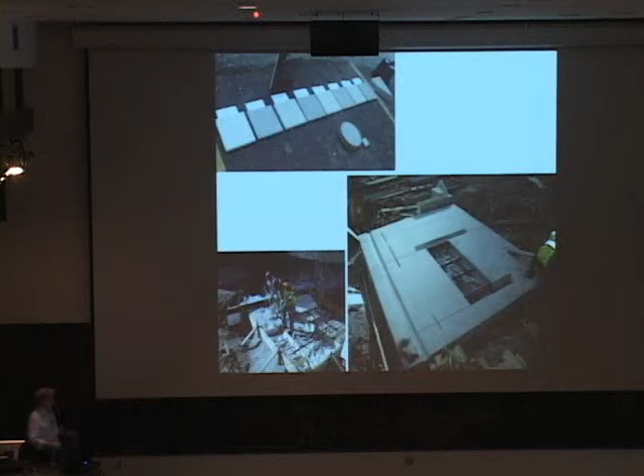This is done on site. That red tubing is glycol tubing, a snow melt system built into the slab so they would never have to shovel or salt it. There's also conduit, rebar, and aeration piping for the trees to aerate the soil. We try to come up with every condition we can think of and put it in this slab. Here's a little piece of foundation wall, because there's one area where the slab comes up against the foundation wall.

This is a moss pit, this is a tree pit, this is a little channel for glazing, and this is a little trench filled with gravel inside. We're trying to identify every condition we're going to encounter. These are actually pour joints—this panel was poured separately from that one and from that one. The lines moving east-west are control joints cut in with a saw.

This is the final product. There are three types of trees here, as listed. These trees will grow to about 25 or 30 feet tall, almost as tall as that space when mature. They'll be pruned so the canopy starts at about 7 or 8 feet. So when the trees are mature, maybe 8 to 10 years, the canopy will form another room within that room—the outdoor garden.

This is a close-up of the concrete slab. You can see a pour joint here, and this is a control joint cut in with a saw. That's the moss, and this is the tree pit. In the tree pit we used loose stone—the same aggregate used in the concrete.

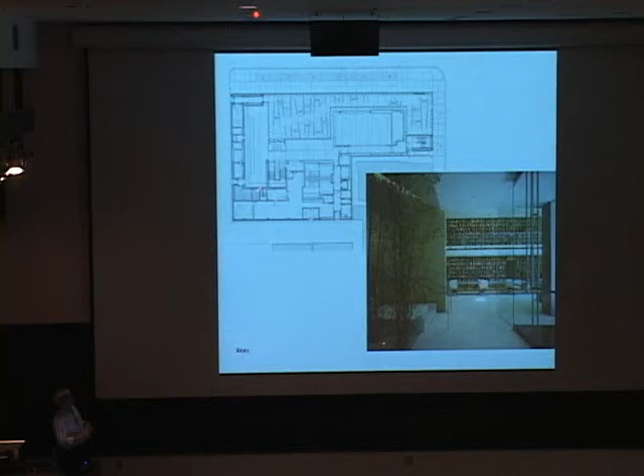This is coming towards the entrance of the building at night, and then once inside, looking into the library, located here. There are 35,000 volumes in the library, and the idea was to have books on three walls and then look out into the garden on the fourth wall.

All of these books were review copies the magazine had received over the decades, which were sitting in the basement of a library in Chicago. So for the first time, these were made accessible to the public.

This is a diagram of the wood here. You can see the shelving wrapping around. It's made of Baltic birch plywood, and we exposed the edges of the plies.

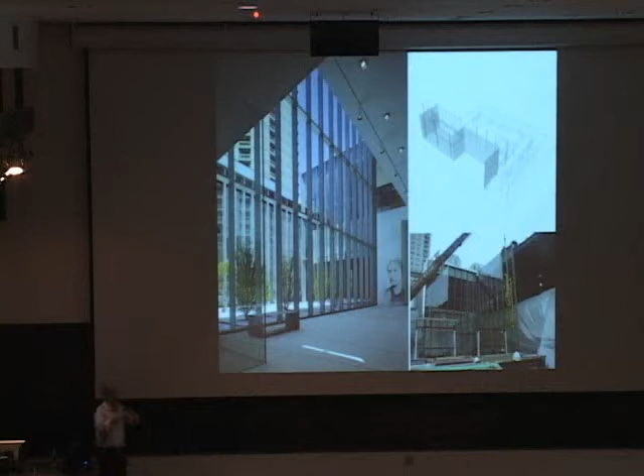This is the glass system, a custom designed, custom engineered system that spans 36 feet. It's a unitized system, meaning it comes to the site in a single panel that's 1 meter wide and 36 feet tall, and then connects into the next one.

This is looking towards the performance space—we wanted to remember Harriet Monroe here. This is a gallery for changing exhibits related to poetry. This is the graphic we put on the wall of Harriet Monroe, which we digitized from an old photograph and created as a vinyl transfer.

Then, inside the performance space, looking out into the garden. The charge of this performance space was to make it perfect for the spoken word, such that a poet could come in and read her poetry without any amplification.

There are 2 challenges there, acoustically speaking. One is the isolation of outside noise, which we did with 3 layers of glass. This is 3/4 inch monolithic glass with silicone joints, and then 2 more layers of glass 2 feet away in that window framing, which isolates all the street noise.

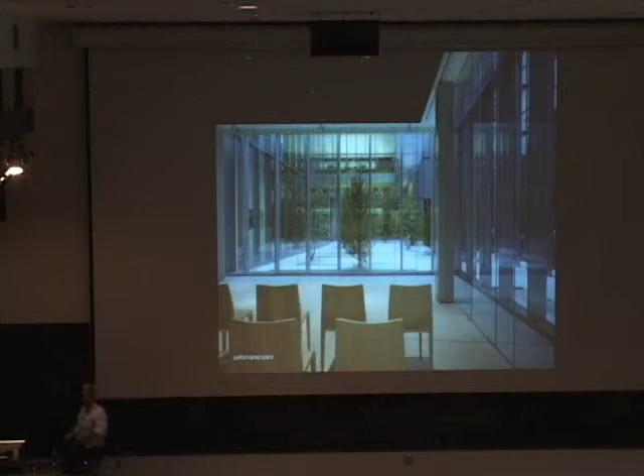Room acoustics is the other component. Certain walls have to be acoustically reflective, some have to be absorptive, and some have to be diffusive. This is an image of the diffusive wall. It's basically a striated concrete block that's grouted solid for mass, so sound waves hit that and scatter in different directions.

These walls are acoustically reflective to throw the sound out into the space, and then the back wall is acoustically absorptive. It's actually a fabric, looks like drywall. This is the stair leading up to the 2nd floor around this bamboo.

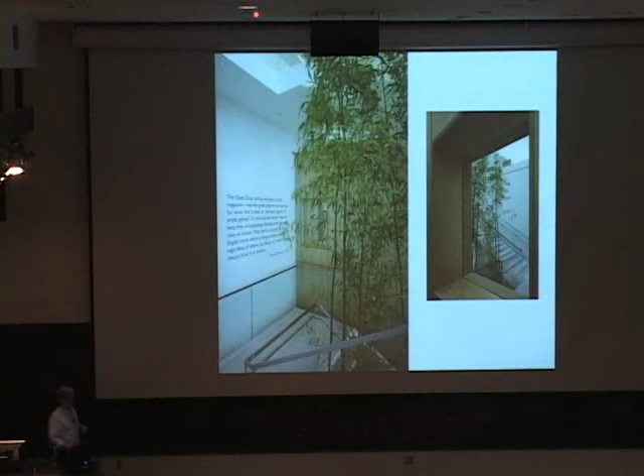The open door policy is kind of an editorial policy from the first magazine. The bamboo is really to kind of pull the garden into the building and then vertically up through the building to the 2nd floor.

This is looking back from the top of the stairs towards the garden. In this image, you really get the sense of the garden as almost a discrete volume, or another room of the building.

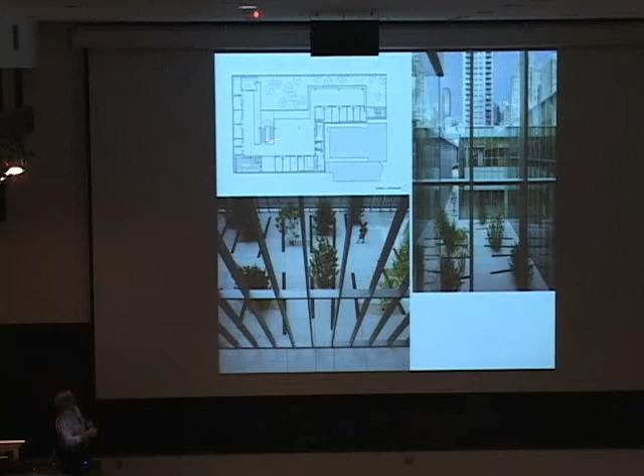This is that wood system wrapping around the 2nd floor. There are openings in that wood wall through which private offices and conference rooms and so forth exist. The open office area looks out into the garden below. These are 3 open office areas here, here, and here, with views out into the garden.

This is kind of looking simultaneously from the inside out at the garden, and then down inside to the gallery below. This is looking back from the work area through the garden at night, back into the building, into the library.

This layer of zinc, as I said, wraps around the building and becomes perforated at the garden. These were some of the early studies we did as to what should be the character of this zinc screen, looking at different materials.

These are kind of perforation studies. We're looking at different degrees of perforation here, and the color of the supporting structure — what will the impact of that be?

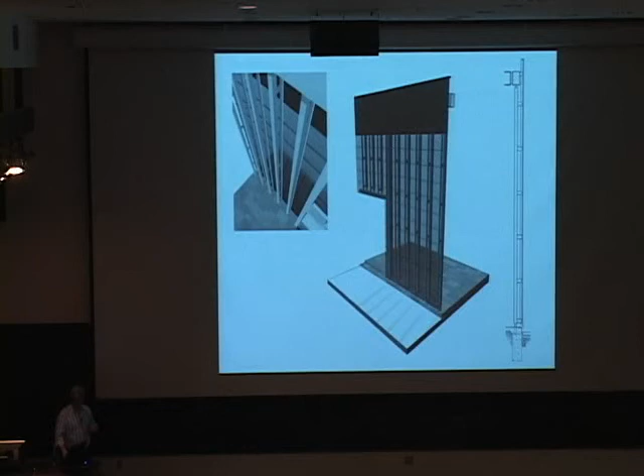Once we have that figured out, we do more detailed drawings. These are digital models of the screen and its structure. And then we make a full-size mock-up — this is a 36-foot tall mock-up of the screen.

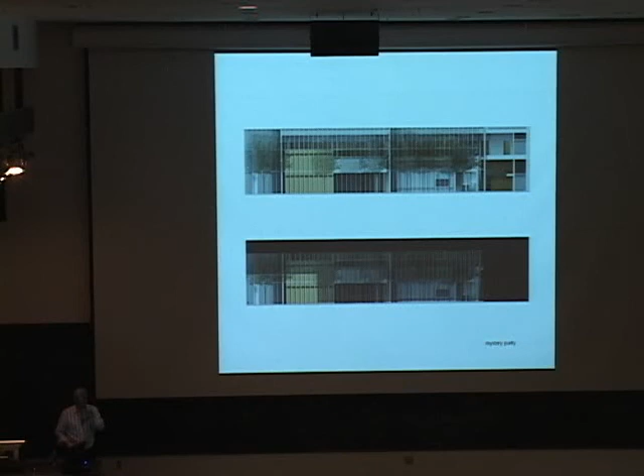You'll notice the structure is a little bit different here and here. We're still kind of looking at a couple different ways to do it. And then a section through the garden, and another elevation looking through this kind of veil-like screen, which would give the building a sense of mystery.

This is the alley elevation, so you can see how the zinc wraps all the way around, even over the windows. And this is where it borders on the garden — here you can see it transitioning from solid to perforated, looking into the garden.

This quality of when you look at the building obliquely, it looks monolithic and solid, but when you look at it in a normal direction, it becomes more veil-like and diaphanous. These are that same issue — looking as you approach the building, down the street, and then straight through the screen from the sidewalk.

The screen was black because black connotes a kind of authority and seriousness, and at the same time I felt the building should have a certain mystery or enigmatic quality, where somebody would want to explore it and search and say, what is that building? And go inside and find out that it's about poetry.

This is what the building looks like at night, when they're having the readings.

So the idea is not that the building is a one-liner. The intent is not to shock. It's not to surprise. It's not about self-expression. It's not about form.

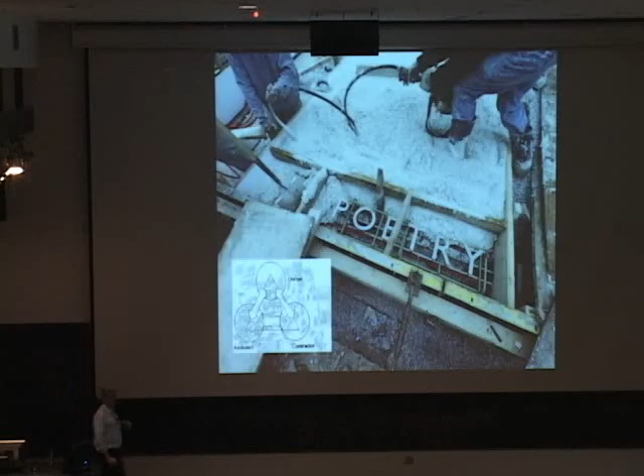I think we're at a crossroads right now in the profession, and if we keep going down the road we're on, we're going to move further and further out into the galaxy. Or we can reassess our priorities. Maybe the role of architecture is not always to shock. Maybe some things need to be confirmed or validated. What do we leave society when the novelty of form has worn off?

That's for you guys to decide. Thank you.